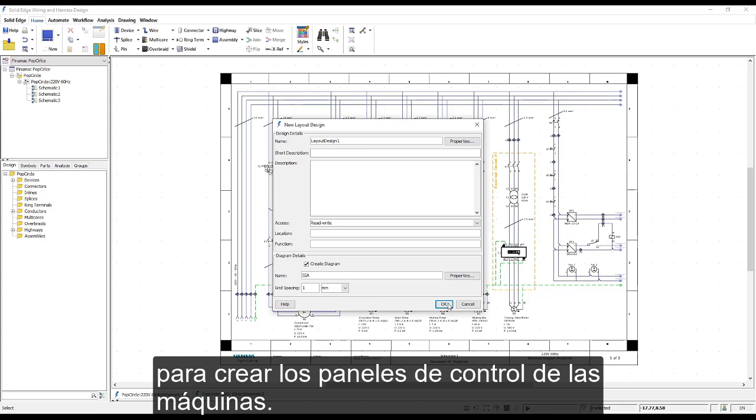Solid Edge 2021 Wiring Design prepares the layout of industrial control panels with new cabinet panel capabilities that allow us to reuse the schematic intelligence to generate the panel layout.

Placing the correctly sized cabinet based on our specs, we can add additional items such as backplates, channels, mounts, and other hardware. We also need some wiring ducts, so here we'll place a series of channels.

Dynamic dimensions provide accurate feedback, and industry standard profiles are available.

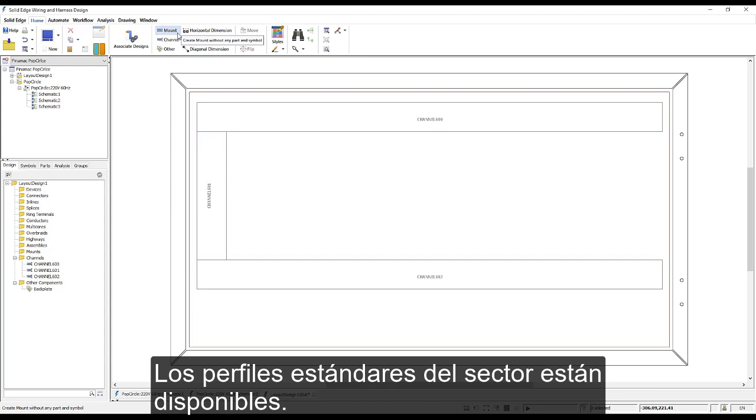Using the Mount command, we can add the necessary DIN rails to which we will attach electrical components. Again, accessing the properties allows us to choose from industry standard sizes and profiles.

Adding some dimensions to the mounting plate, as well as the channels and rails, will help document their positions.

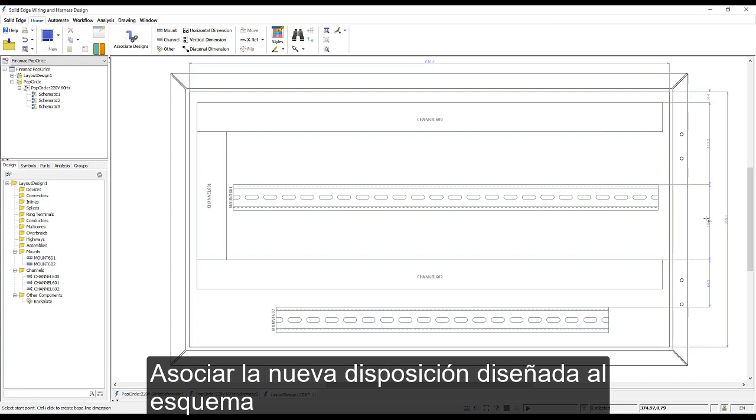Associating the new layout design to the schematic allows us to place the relevant logical electrical components.

Placing devices is simple, and there are many ways in which this can be achieved. We can place single objects or multiple objects at the same time.

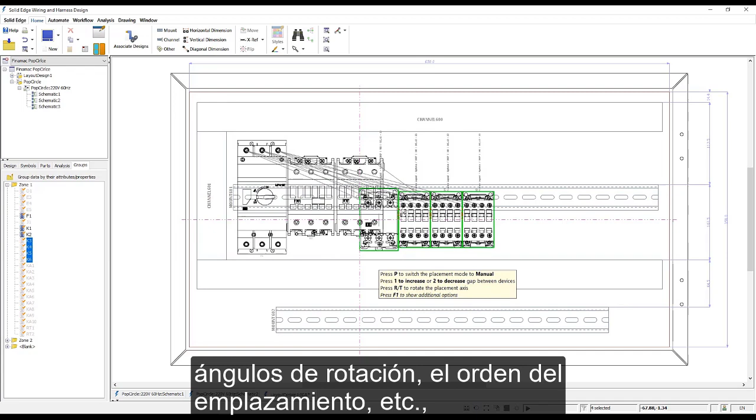Shortcut options allow control over snap points, rotation angle, the order of placement, and much more, all of which are dynamically previewed during the placement process.

The last few devices are placed onto the top and bottom rails quickly and easily.

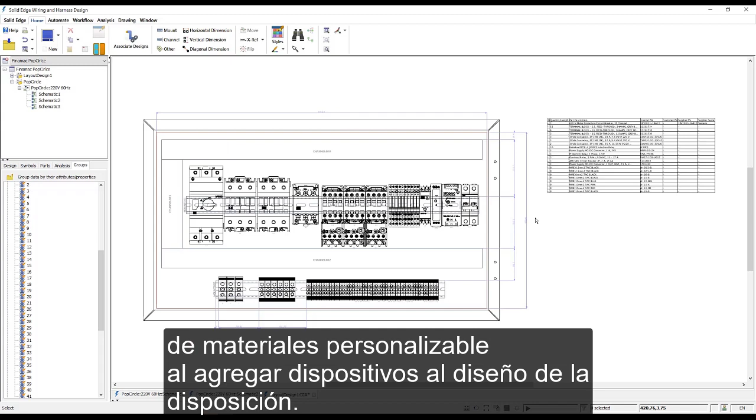A bill of materials, which is fully customizable, has been automatically built as we've added the devices to the layout design. The bill of material IDs can be easily generated.

Balloons are added to each of the devices on the panel layout after generation of the BOM.

The final required deliverable is a terminal plan, which assists in the assembly and wiring of the terminal strips.

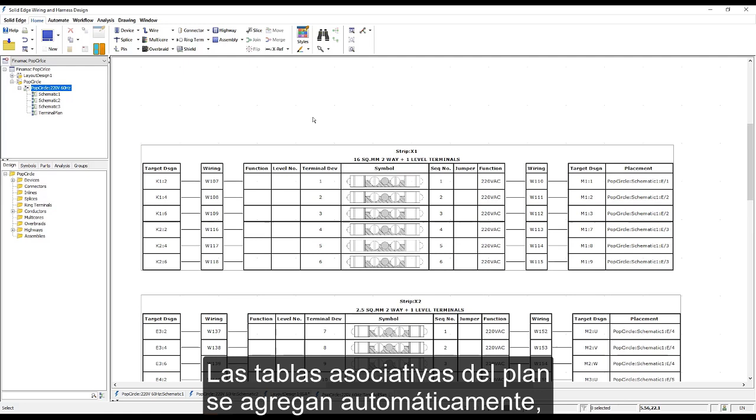The fully associative terminal plan tables are automatically generated, documenting the terminal blocks along with their specific symbol, physical sequence in the strip, and details of where the wires terminate at both ends of each block.

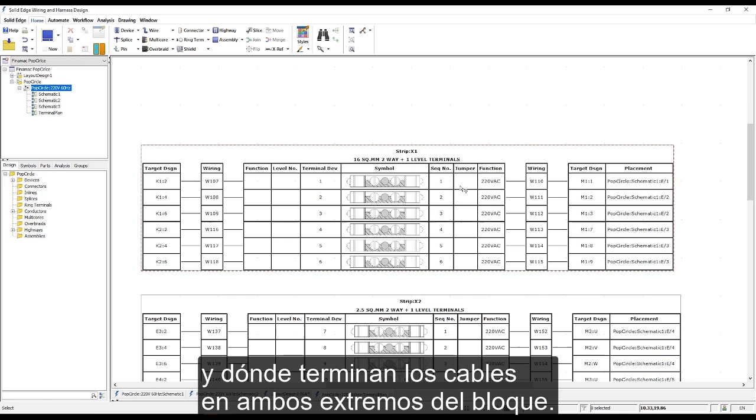Now that the electrical design and documentation is complete, we wish to share this information with our MCAD colleagues. Connected mode makes it easy for the ECAD and MCAD worlds to collaborate.

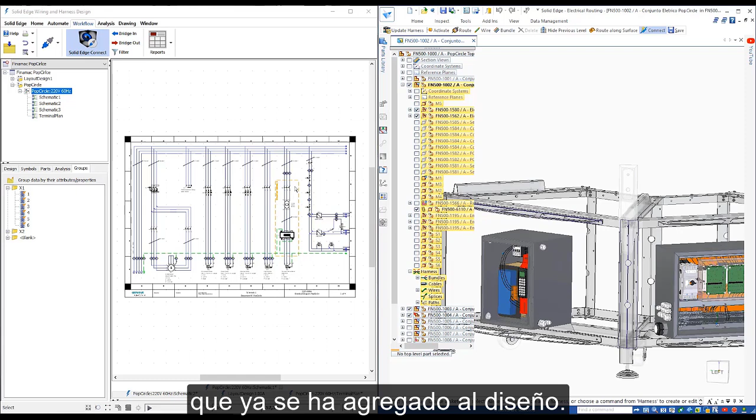Switching to Solid Edge 3D CAD, we can see the existing wiring details that have already been added to the design. With Connected mode active, we can cross-highlight components between the two disciplines.

We'll bridge in some final conductors that have been added to the design to connect the two cabinets together. This synchronizes the wiring details and automatically creates them in Solid Edge 3D CAD.

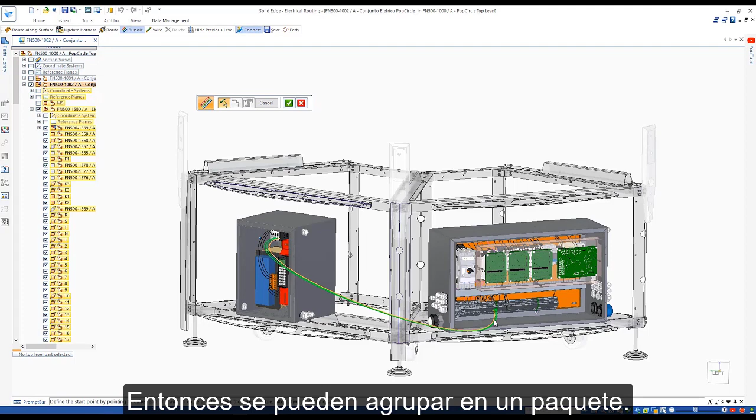We can then bundle these wires together. To keep the bundle neatly organized within the assembly, the new Route Along a Surface command provides a highly efficient way of routing the bundle path around the contours of the frame.

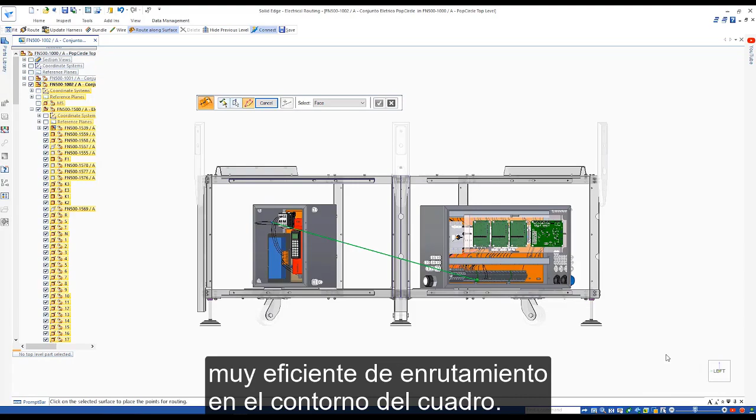All that is needed is to pick the bundle to be routed, select the faces of the geometry the bundle needs to follow, and plot some points to define the path. Then route the ends of the bundle through each of the glands on the respective cabinets.

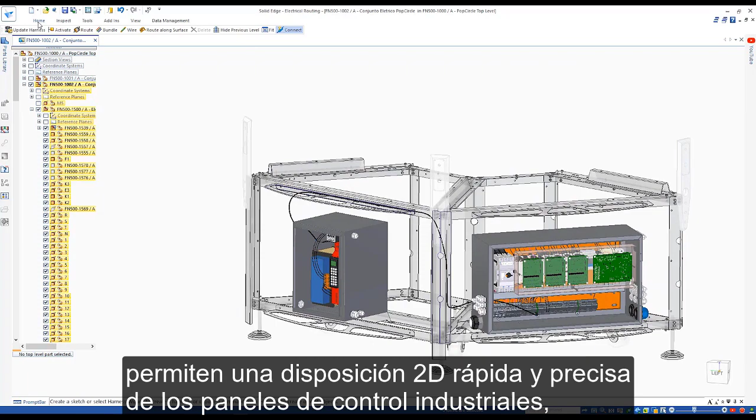Solid Edge 2021 electrical design software modules enable fast, accurate 2D layout of industrial control panels, providing great new functionality to improve your electromechanical design efforts.